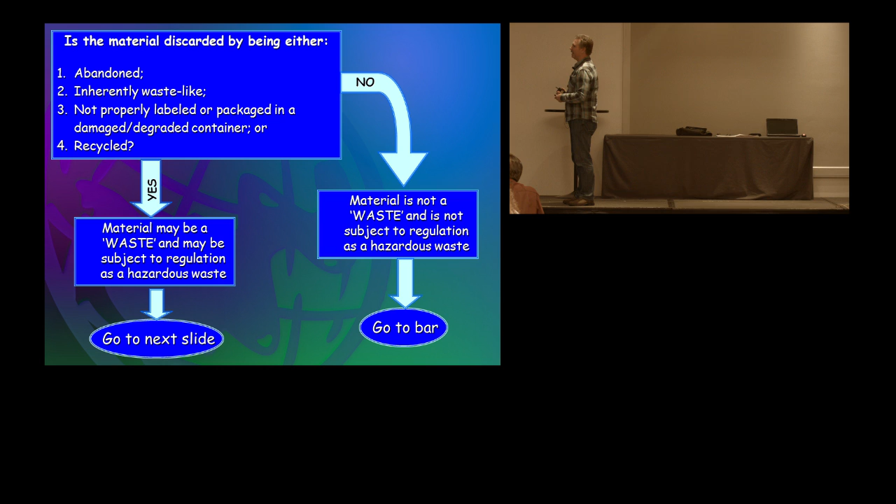Is that a big deal? Sure it is. You know, if you're looking at, do I need to do a pollution prevention plan? May not need to do that because these materials are not waste. Am I a large quantity generator? Maybe not, because these materials are not a waste. If they're not a waste, they're not a hazardous waste. It doesn't count towards the amount of hazardous waste that you generate. So there are a lot of benefits to recycling, especially if you can follow this path to where it's not a waste. So is the material being reclaimed?

Yes. The material is a waste and subject to regulation as a hazardous waste, but there can be some regulatory relief. So it's very important to see where we're falling. Both of them are recycling, but one less regulated, one more regulated.

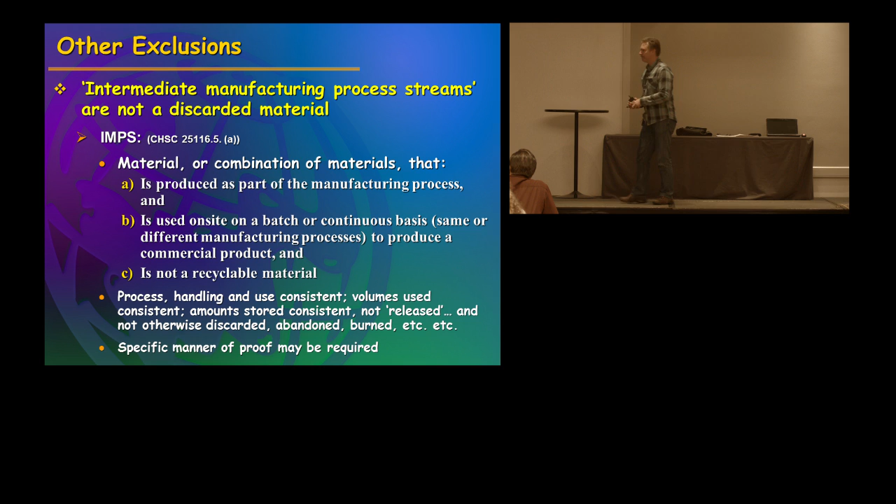Somebody at the break was talking to me about universal waste. Universal wastes are a subset of hazardous waste. If you follow the conditions, you're allowed relaxed management requirements for universal waste, correct? But if you don't follow those, it reverts back to being a hazardous waste, and you have to meet those requirements. So you always have the option on universal waste to manage it as hazardous waste, or you can follow the conditions and manage it as universal waste.

But you can't just throw it in the trash and say, well, it's only universal waste, not hazardous waste. You lose those exemptions, and then it becomes hazardous waste again. So it would be illegal disposal of hazardous waste, not illegal disposal of universal waste. Same with this stuff. The recycling exemptions, if you don't follow them, then you're going to lose that.

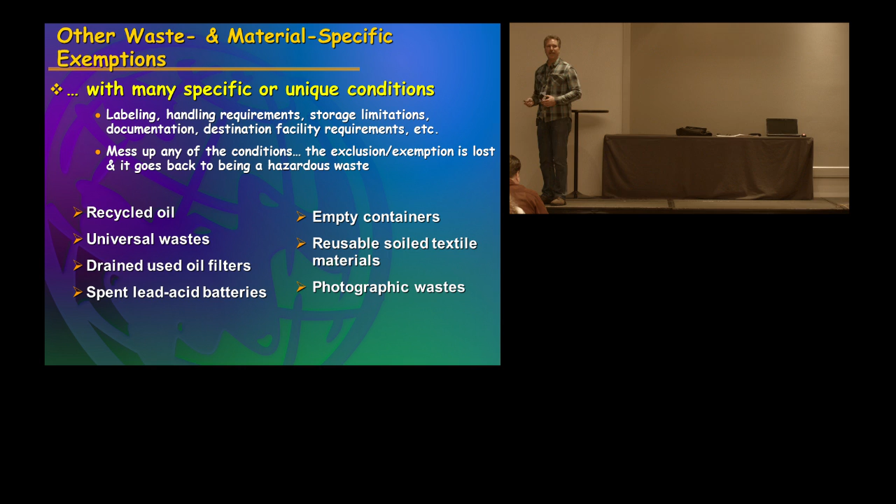There are still dental offices that refuse to go digital. But I mean, who takes pictures with film anymore? Almost nobody does. If you're into advanced photography, maybe you still are.

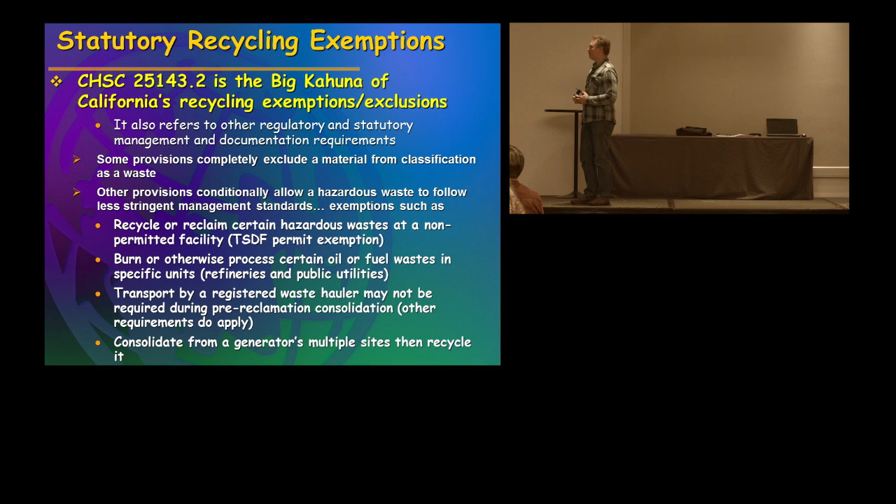Recycle or reclaim certain hazardous waste at a non-permitted facility, so not a TSDF. Burn or otherwise process certain oil or fuel waste in specific units such as refineries and public utilities. Transport by a registered waste hauler may not be required during pre-reclamation consolidation. So these are all specific exemptions that you may be able to utilize. Consolidate from a generator's multiple sites, then recycle it at one main site. So we'll go into these in detail.

Statutory recycling exemptions are not a free ride. Recyclable materials are subject to California hazardous waste statutes and regulations. Unless the recycled materials are otherwise exempted or excluded by these or other regulations, recyclable materials used in certain ways are waste when recycled. And again, this is the EPA, if you're doing these types of things, they don't give you a pass. What are they?

Use constituting disposal. What does that mean? Come on, you guys should be firing them out now. Putting it on the land, right? Use constituting disposal means it's going to the land. Burning for energy recovery, speculative accumulation, inherently waste-like. So what does inherently waste-like refer to? Dioxins. Used or spent etchants and used oil.

Most of the 25-143.2 exclusion exemptions contain wording "except as otherwise provided in subsections E, F, and G, recyclable materials that is managed in accordance with section 25-143.9." What does it mean? You still have to follow these things. What happens is when you get into recycling a waste, you get out of the generator requirements and you go into the recycling requirements. So what it's saying is if you're going to use these exclusions, these are your requirements that you have to follow now.

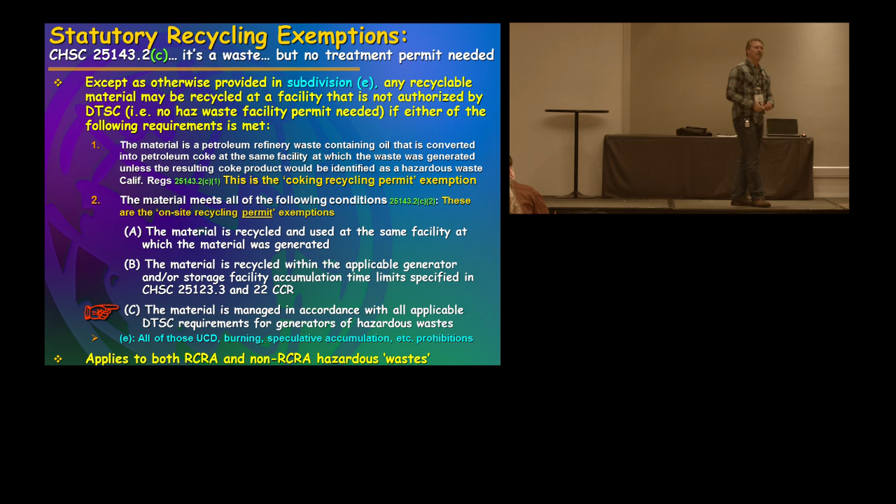So what does this give you? Basically what it gives you is it allows you to treat hazardous waste without a tiered permit. So that's something, but that's basically what you're getting out of this. You can recycle or reclaim your waste any way you want without a tiered permit. You don't need a tiered permit.

So the material is a petroleum refining waste containing oil that is converted into petroleum coke, blah, blah, blah. This exemption is for refineries. The material meets all the following conditions. The material is recycled and used at the same facility at which the material was generated. So on-site generated, on-site used. You cannot take this material, reclaim it, and sell it as a product under this exemption. It must be reused on-site.

So my example that I gave you where I had the solvent as an auto body shop and I was reclaiming it and using it at my facility, that falls under this exemption because I generated it on site, I reclaimed it on site, and I reused it on site. See, and I got to it. It just took me time.

Okay. The material is recycled within the applicable generator and/or storage facility accumulation time limits. So if you go past your 90 days, now you're storing hazardous waste past 90 days, you're no longer a generator, you just became a facility without a TSDF permit. Do you think that's bad? Oh yeah. That's why that accumulation time frame is so important, because if you go past that, you don't follow generator rules anymore. Now you have to follow facility rules.

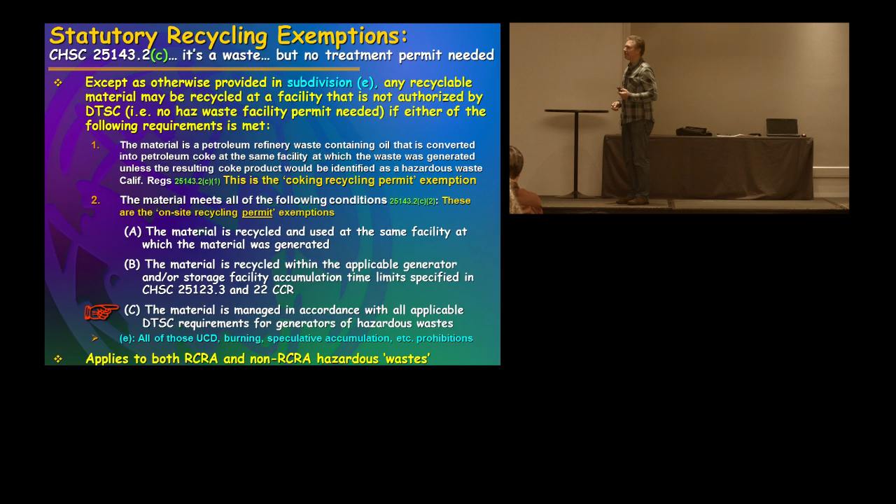The material is managed in accordance with all applicable DTSC requirements for generators of hazardous waste. The only real exception that you get for that is you're allowed to put the excluded recyclable material label on instead of a haz waste label. But the accumulation date needs to be on there, and you need to manage it within your accumulation time frame. Any questions? All right, so a couple examples of some distillation units for recycling on-site use.

The last one, D, and D is complicated, but the big deal with D is it's not a waste. So this is the other one that's not a waste, but the criteria on this one is it must be non-RCRA. So the state can never be less restrictive than the federal government, correct? So B and C are federal exemptions because they allow that for federal waste. So that's why it can be RCRA or non-RCRA. But for D, what they did is they created some additional exemptions, but they can only be for non-RCRA because these exemptions would not be allowed for RCRA waste. So that's a big thing.

It must be non-RCRA. Remember that table where we had the sludges, we had the byproducts, and we had the commercial chemical products. Under the federal government, if you reclaim them or recycle them, they're not a federally regulated waste. So they would be regulated as non-RCRA. That's where that table can really come in. If you have a RCRA waste and you're recycling it, look at the table and see if it falls out. If it does, then you can use D. And I almost prefer D over B.

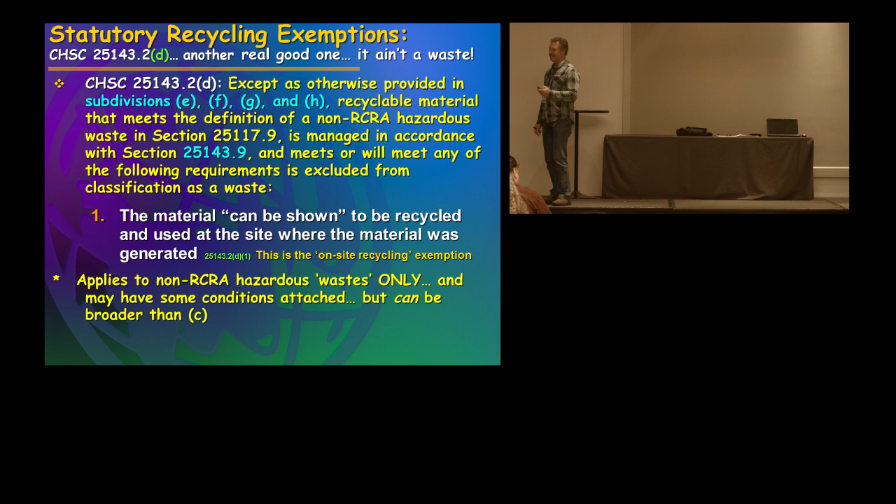Material qualifies as one or more of the following. The material is a product that has been processed from a hazardous waste or has been handled at a DTSC permitted authorized facility to process or handle the material if the product meets both of the following conditions. The product does not contain constituents other than those for which the material is being recycled that render the material hazardous. The product is used or distributed or sold for use in a manner for which the product is commonly used. So this one allows you, under certain circumstances, to reclaim it on site and sell it off site as a product. But it has to meet these conditions.

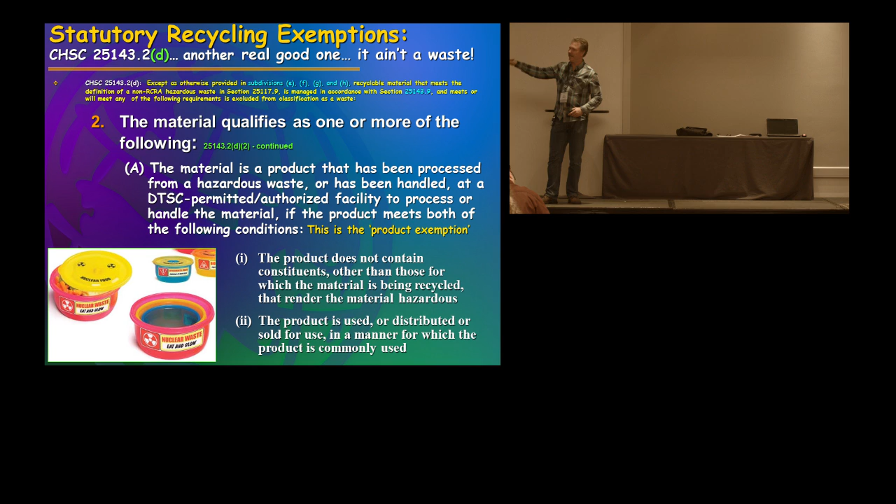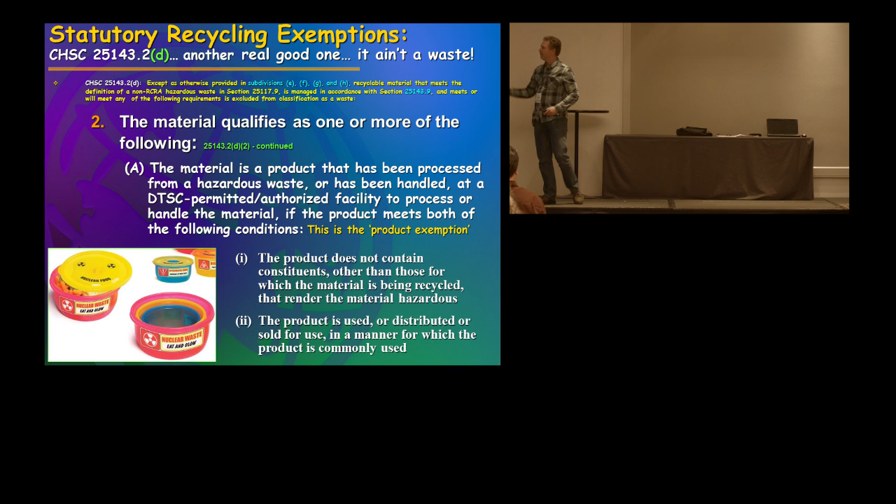Remember, one was do whatever you want to it, but you got to use it on site. If you want to sell it as a product, you got to meet these conditions. So there is some allowances for non-RCRA waste to be recycled on site or reclaimed on site and then shipped off as a product. But you got to meet these conditions. I haven't really seen much in the way of doing that.

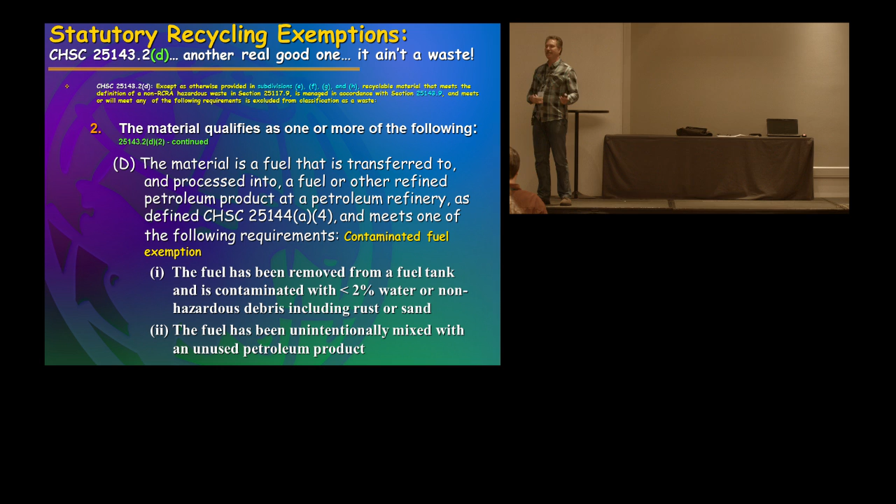And 2D, the material is a fuel that is transferred to and processed into a fuel or other refined petroleum product at a petroleum refinery. So again, this is another petroleum refinery exemption. It makes sense that if they're processing oily material, why can't they take their oil waste and feed it into their process to make a product? It's not really that much different from the feedstock that they're putting in there to begin with. So again, does that seem legitimate? Recycling seems legitimate. It's the same. The waste material has the same properties as the raw feedstock that they're using, and it's not less beneficial for them to use that.

Number 3, transported between locations operated by the same person who generated the material if the material is recycled at the last location operated by that person, and all of these conditions apply. So basically what it says is that if I have several facilities, I can drive the waste to my one main facility and recycle it there.

So it's all their waste. They don't need to use a manifest to drive it. They don't have to be a licensed hazardous waste hauler to drive it. It just allows them to consolidate the same type of waste. Now, why are they allowed to do this? Doesn't the federal government say hazardous waste must be transported using a manifest?

It's not regulated by the federal government, so it's not a RCRA waste. Again, that's why it's important that it be a non-RCRA waste on these. They're allowing things that the federal government would never allow you to do. You can't do this with a federally regulated waste. You're hauling hazardous waste without a transporter, without a manifest. The federal government doesn't have any allowances for that, but the state does. They can make allowances because this is not a federally regulated waste. So it's very important. We're only talking non-RCRA waste under D.

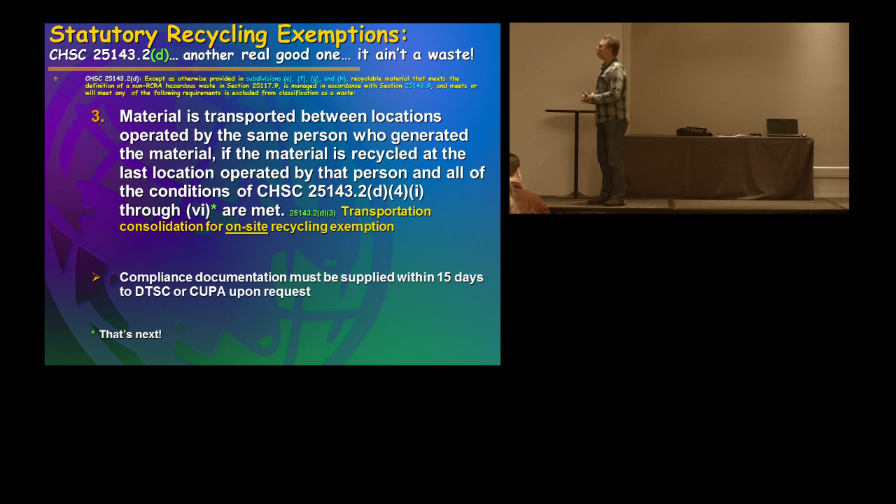And the next one. This one is just so confusing compared to this one. They're almost the same. Material is transported between locations and operated by the same person who generated the material. Doesn't it sound the same as the other one? The only difference on this one is that you send it off-site for recycling. So it allows you to transport your waste to one site, consolidate it, and then ship it off to somebody else to recycle it.

Almost sounds like remote consolidation, doesn't it? So it's very similar. I don't have the remote consolidation requirements memorized, but in reading this, it seems very similar to what is allowed. The only additional thing on this is it has to be sent to a facility to be recycled. And when I say facility, I mean TSDF. It has to go to a facility to be recycled. So it's just allowing you to pull your waste together and ship it off-site for recycling, but it's going to a facility. So if it goes to a facility, it's going to be either on a manifest or on a consolidated manifest.

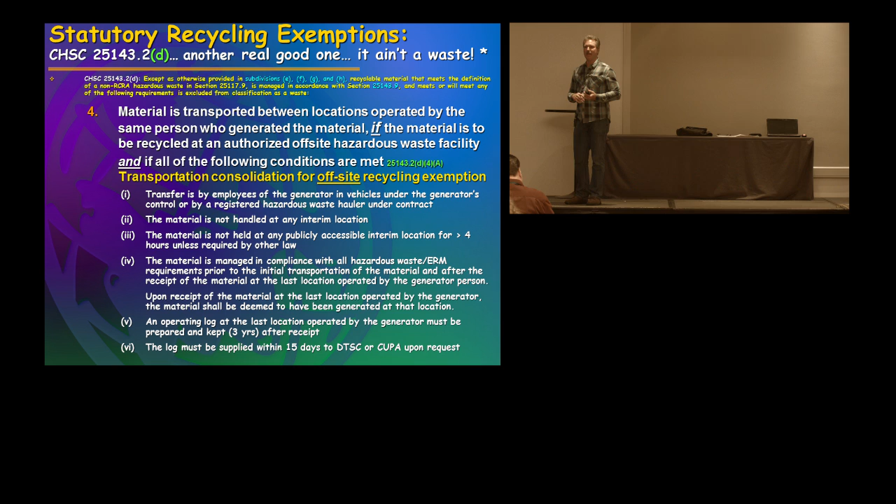All right, so now we get to 5 and 6, and they're similar, and they have the same conditions. So they're like the recycling twins, if you would say. It says you could use this for on-site or off-site, but the reality is you would only really use this for off-site. Because if you were going to do any reclamation on-site, why not just use one? Remember, there were no restrictions on D1. As long as it's generated and reused on-site, you can do whatever you want.

But the state does allow you to take your waste and ship it off-site, and the company that receives it does the reclamation. So it's almost like you're sending it to a facility, but they don't have a permit, and they're recycling it through reclamation without a permit. So this is what allows them to do that. So let's go to the next slide, and it's got the details. So this is what it says.

The material is used or reused as an ingredient in an industrial process to make a product if the material is not being treated before use or reuse except by any one of the following. We'll show you what those are. And if the resulting air discharges produced do not contain constituents that are hazardous waste and are in compliance with applicable air pollution control laws. So basically, you're allowed to reclaim it, but you can't be putting toxins into the air in the process of doing it.

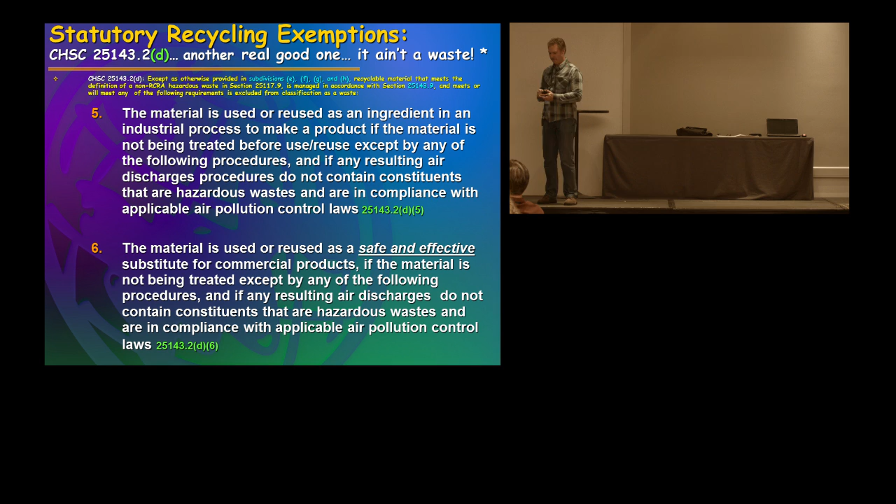So there's a lot of physical things that you can do, but you're kind of limited on chemical stuff that you can do. You can do pH, and well, viscosity adjustment's really not a chemical. pH adjustment would be a chemical change. So that's the only chemical. The rest of these are all physical changes to the materials.

So you're allowed to send your waste off-site if they're doing these types of treatment to reclaim it. You can do it on-site, but why go through this when you're unlimited on 25-143.2 D1 on the reclamation?

What if you had, say, oil contaminated with coolant or something that would gravity separate, but you want to use part of it but not the other part? Could you use this to take part of it away and use the second part? Yeah, you can. So she's asking if you're using gravity separation, part A is good and part B is no good. So you would be shipping off part B as a waste or a byproduct, and part A would be the reclaimed part. And you would be allowed to do that.

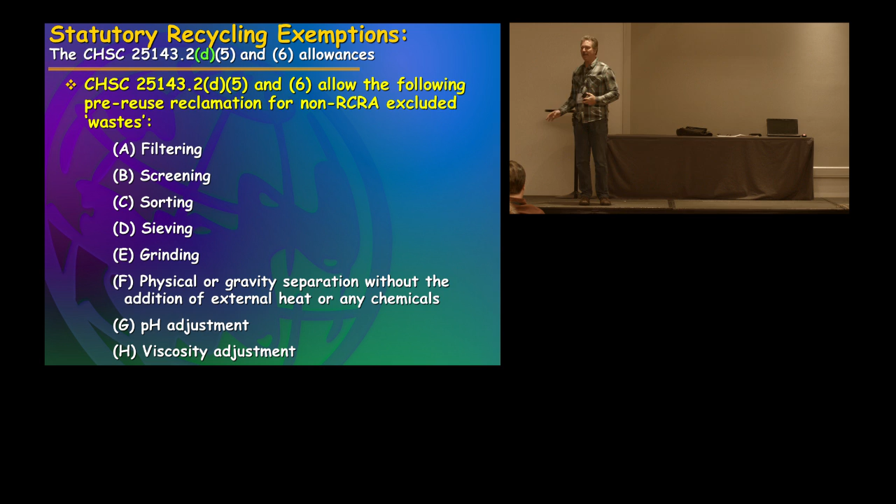They were able to recover almost 100% of the ammonia. And so they were recovering 3%. The other 97% they discharged to the sewer. The DTSC agreed that that was legitimate recycling. So they recycled 3% and they disposed of 97%. Why is that legitimate? Because the DTSC felt that 100% of the hazardous constituents were being recycled. So you can't go by a simple percentage. Again, it's case by case.

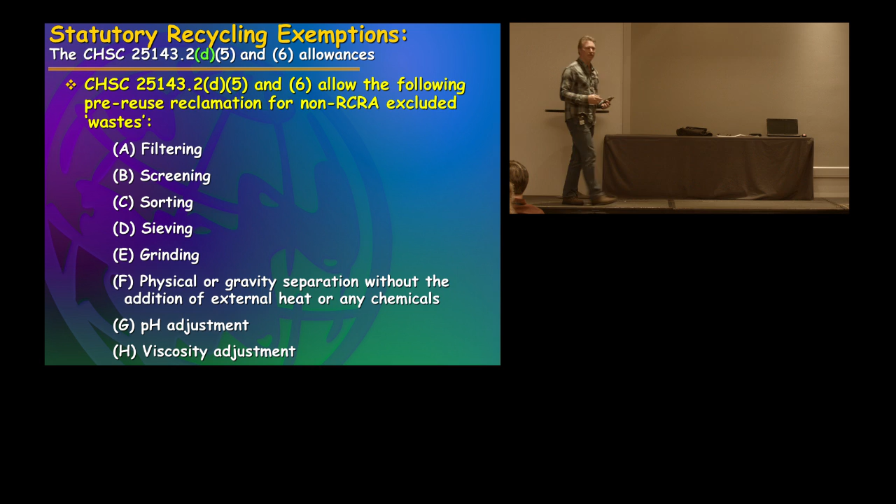So you could start with your CUPA and say, I'm thinking about recycling. This is what I want to do. Do you guys think it's legitimate recycling? And you can get an agreement that, okay, we feel that that's legitimate. So you've got to kind of make your case. This is our waste, and this is what we're going to do with it. And they'll make a decision.

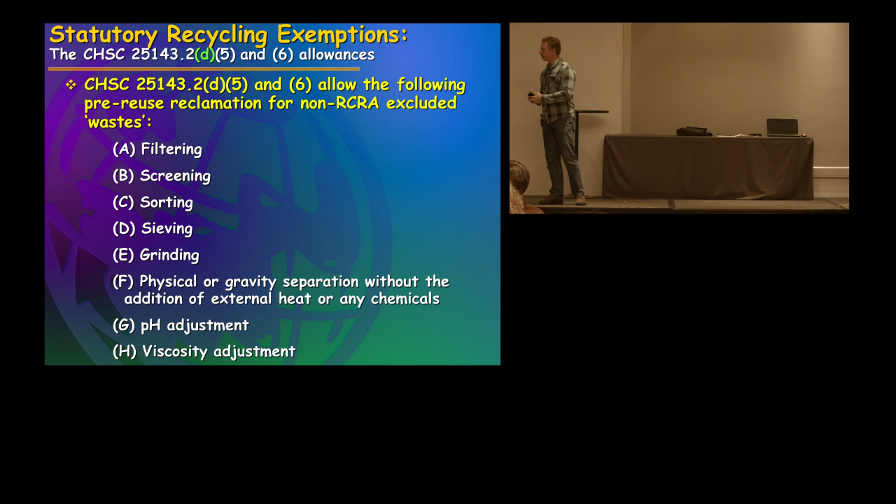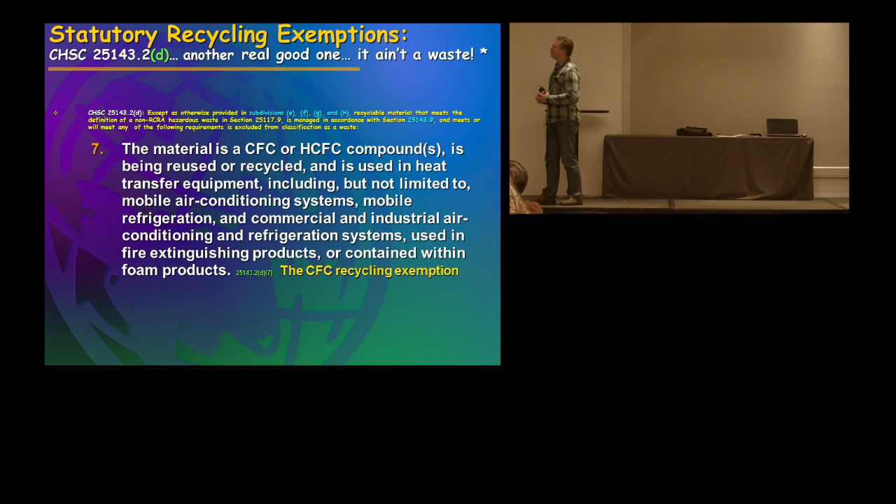The last one is for chlorofluorocarbons or hydrochlorofluorocarbons compounds being reused or recycled and used in heat transfer equipment, including but not limited to mobile air conditioning systems, mobile refrigeration, commercial and industrial air conditioning and refrigeration systems, used in fire extinguishing products or contained within foam products. So it's a CFC recycling exemption. And you do see that at facilities that do reclamation on white goods, as they call them.

So let's look at some of the things that need to be followed. The following recyclable materials are still a hazardous waste. RCRA hazardous wastes that are use constituting disposal or used to produce products applied to the land. So there's no exclusion for those. Non-RCRA hazardous wastes that are use constituting disposal or used to produce products applied to the land. DTSC can make regulatory exceptions.

I know we had one, a company was taking a waste that had zinc and they wanted to use the zinc to make a fertilizer. Zinc is an element of fertilizer. So is it being applied to the land? Yes. But is that its original intended use? Is that what fertilizer has done? Is it a viable ingredient? So they can make a special decision that that is allowed.

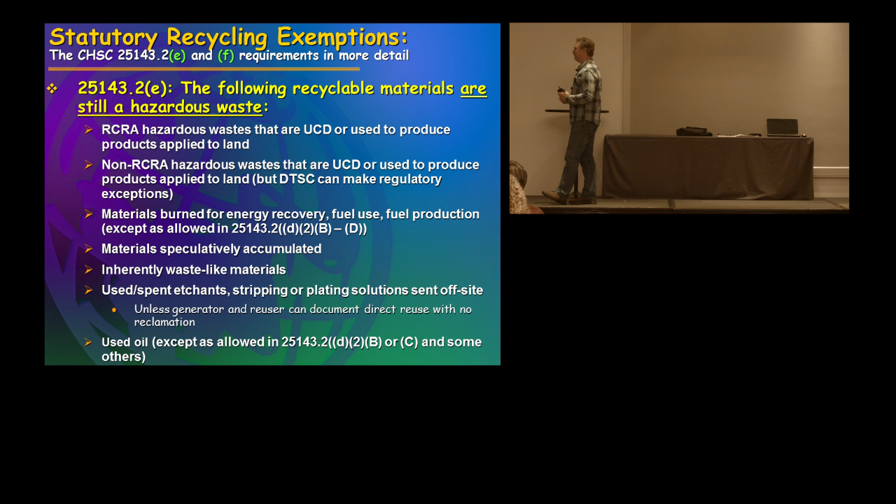But you would need that from them because you are applying it to the land. So that's where you would go to the state and have an exception made, because normally you cannot have your products applied to the land. Materials speculatively accumulated, inherently waste-like, used or spent etchants, stripping, or plating solutions sent off-site, and used oil, except as allowed in certain conditions.

F, documentation requirements for anyone claiming an exemption or exclusion, upon request by EPA, DTSC, or the CUPA, within 15 days. So they don't have very long to provide the information. Provide name, address, phone number of any facility that manages the material and any other information related to the management of the material. So if you're sending it off-site, you have to keep records of what was being sent off-site.

Maintain adequate records to demonstrate to the satisfaction of the requesting agency that there is a known market or disposition for the material and that the requirements of any exemption or exclusion are met. So you have to be able to show it's a viable product, and usually the businesses can. But sometimes, if they're trying to play games, you may catch somebody pulling a fast one.

For purposes of determining that the conditions for exclusion from classification as a waste are met, any person, facility, site, or vehicle engaged in the management of a material under an exemption claim is subject to inspection.

So basically, if they're saying it's being used as a product, they can go to that site and actually see how it's being used as a product to ensure that it's not just being stockpiled there as a way of hiding it. All kinds of scams go on in the world.

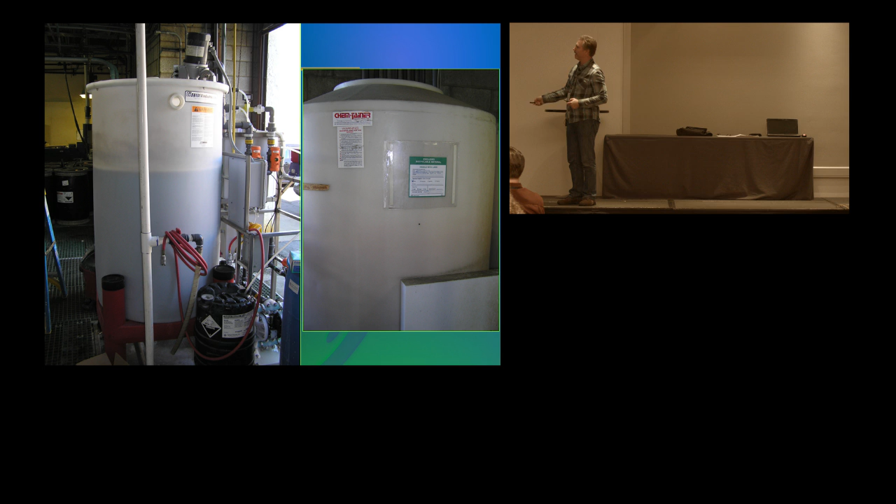Biennial Recyclable Materials Report. The nice thing about this is it's the same year as the federal biennial reports. It's a different date. The federal reports are due March 1st. These reports are due July 1st. So 4 months difference. And it doesn't apply to everybody. You have to recycle either on-site or off-site more than 100 kilograms per month of recyclable material. That would be in any given month, actually. So if you recycle more than 100 kilograms, you're subject to the reporting requirements.

A CUPA can exempt any person who operates antifreeze recycling units or solvent distillation units where the recycled material is returned to productive use at the site of generation. So basically, it's just staying on site. It's never leaving the site. Oh, lots of questions. Well, we'll go back. All right. We'll start in the front. That exemption, that's just from the reporting requirement? Yes.

Next question. I seem to get mixed opinions sometimes from CUPAs on this. The reporting is done by the actual entity that does the recycling. So if it's sent off-site, it's the recycler off-site that does the reporting. Yes. And I would have got to that because that's a great question. You know, who does the report? If you are the generator of the waste, you may not be doing the report. It's the person that is doing the recycling. And by person, I mean entity, company, whatever it is. So if you send your waste off-site to be recycled, you're not filling out this report.

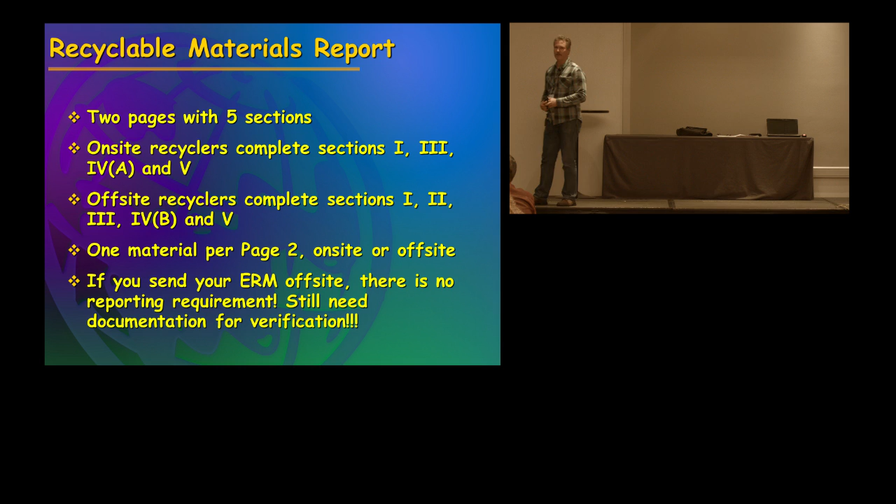Okay, so the report is not in CERS. Anybody dealt with this? You need to go to like Unidocs and download it, fill it out, scan it, and upload it to CERS. The same as you would do like for the emergency response plan or for your facility maps. It's going to be an uploaded document, but it is not a form that's already in CERS. So to do that CERS reporting, you got to manage it the same as like a contingency plan.

The report covers the previous 2 years. So this is an even year, 2016. This report is due July 1st of 2016. You're going to be reporting for the years 2014 and 2015.

Some special types of recycling. I think we'll do all these individually. Empty containers. So if they're completely empty, 5 gallons or less can be thrown to the trash, scrap metal, whatever, not heavily regulated. Greater than 5 gallons, they cannot go to the trash. They must be recycled, reused, reclaimed within 1 year. Have to have documentation on that.

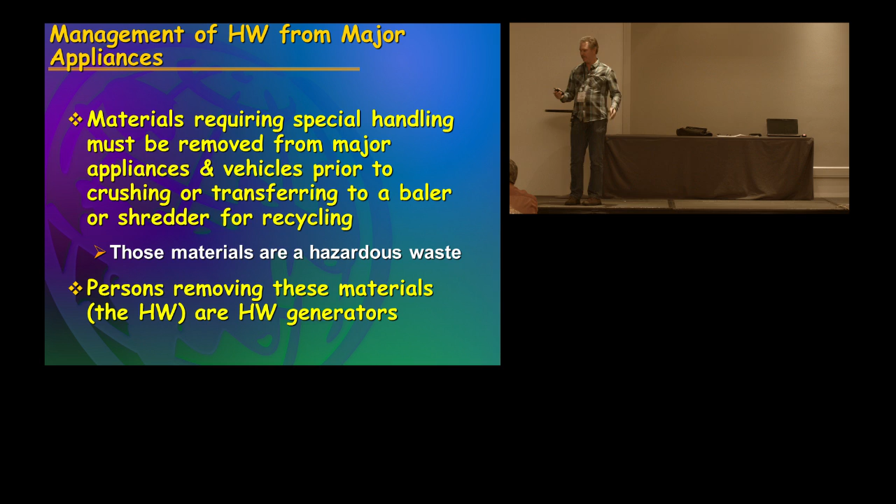All right, so I've got some examples. I'll go through them. If we have trouble, we have a microphone here. I know nobody but me is crazy enough to want to stand in front of a microphone and talk.

Is this legitimate recycling? An aerospace company generates sandblast grit waste from cleaning of various metal parts. The waste contains lead and cadmium and fails the TCLP for D006 and D008 characteristics. So those are RCRA waste, correct? All right, what if I reclaim this stuff? These are characteristic, it's a byproduct or a spent material, so we could go back to that table and see if they were being reclaimed, if they would still be a RCRA waste. So that might impact what we're doing.

The company wants to package the waste without any reclamation to be used for aggregate in the manufacture of asphalt road base material. So they're not doing any reclamation, direct use. It's being substituted as sand. You know, what's the issue on this one? Is cadmium and lead a component of roads? So is it doing any beneficial thing in the asphalt? Is it providing any, does it make the asphalt last longer? Does it have a better black luster because of these materials?

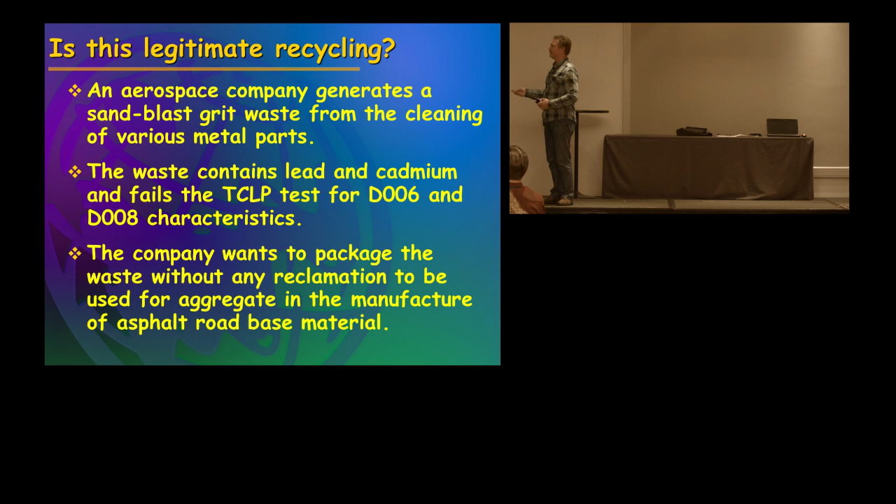So it's probably a sham, right? Or maybe even a sham, because you know it's not going to be as effective as a regular material because it's got this other stuff in it. It wasn't an ingredient that was necessary. They're like looking for a way to get rid of the stuff, so they found something that they could do with it. Doesn't have anything to do with the materials that are making it hazardous. So that's pretty straightforward, right?

Is this speculative accumulation? A company generates 5,000 pounds of a solid waste that fails the TTLC for metals. The waste was generated on March 1st, 2015. The company has the ability to recycle the waste on site using an exemption 25143.2 D1. On January 15th, 2016, none of the waste has been recycled yet. Has the company exceeded their time for storing the waste? Why not?

And so the date didn't start till January 1st. So on January 15th, it's only been 15 days. And they get a whole year. So they're well within their time. Doesn't that sound crazy?

Yes. It was generated in 2015. But the date doesn't even start until January 1st. So January 15th, it's only 15 days old. Isn't that crazy? It doesn't look right, but it is. And that's how it works.

And that's why it's important to understand that definition of speculative accumulation. Because if you go out and inspect and you go, these guys have been sitting on this stuff for almost a year and they haven't done anything with it. Are they in violation? No. They're still within their time limit.

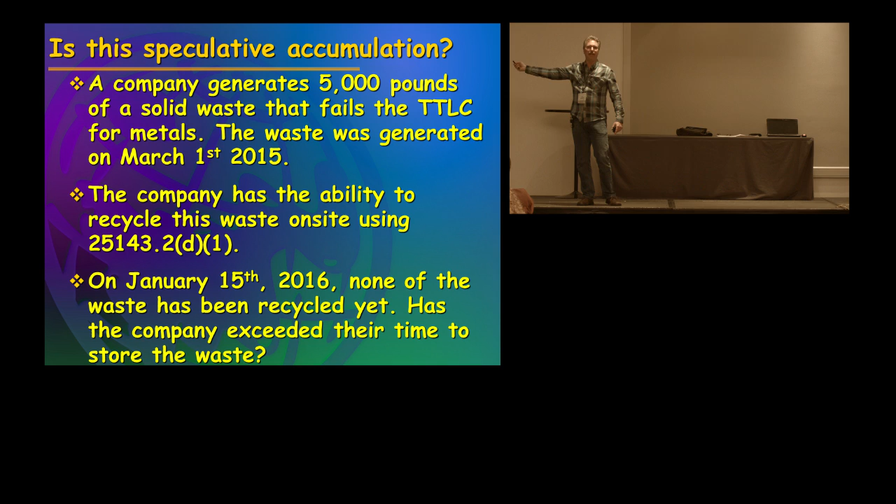I got a question. So she's asking on the labeling of this, it would have to have a label on it. They are allowed to have a hazardous waste label on there, but somewhere it needs to say they're going to recycle it, and it has to have the accumulation date, the date they start. They have to keep records on this. March 1st would be the date that they started to accumulate it. But you can't look at it until January 1st because of the way they wrote the definition of speculative accumulation.

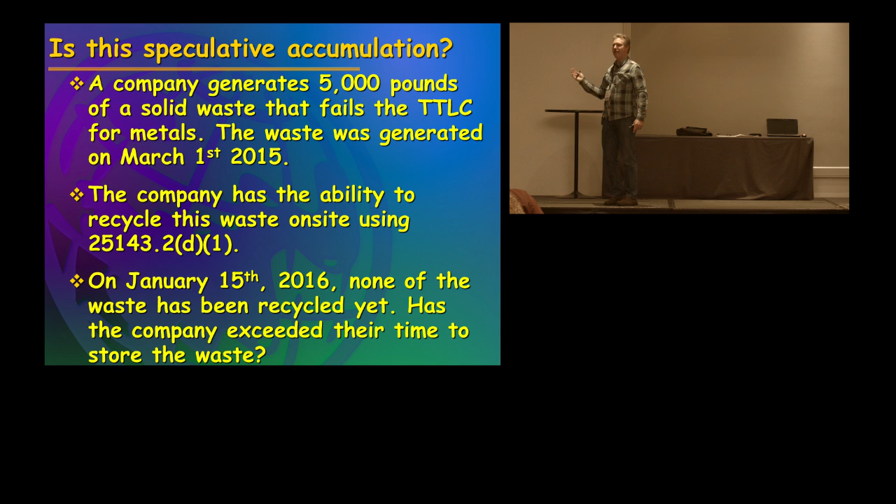It's a federally regulated waste. So D only applies to non-RCRA. So they can't use D. So it's B or C. Are they reclaiming it? And so they can't use B. B is, remember, the MC Hammer rule. They can't touch it. So C, that would be. And that's legitimate recycling under C. They are allowed to do that. But it's still a waste, and they still have to follow generator requirements.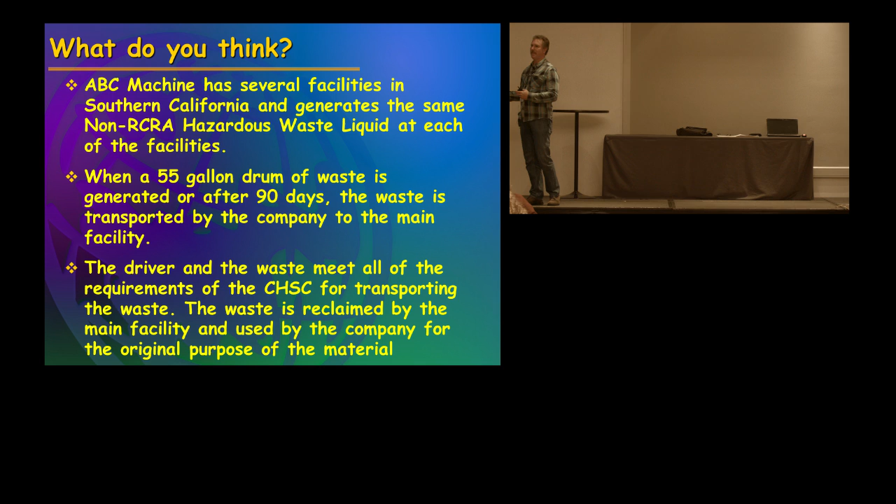D? Okay, and so there was 3. You were actually reclaiming. Remember, 4 was if you're sending it off-site for reclamation.

Maybe. So this one, it's use constituting disposal, right? So there's prohibitions on that. So who would you ask? You ask the DTSC if this would be allowed. It's not a federally regulated waste because zinc is regulated by the state of California, not by the feds. So it would not.

What do you use natural gas for? As fuel. And what are they using it for? Seems pretty legitimate that the material is being used as a fuel. Does it mention any reclamation? So no reclamation. Is it being used for its original intended use? So it seems to me it falls under B.

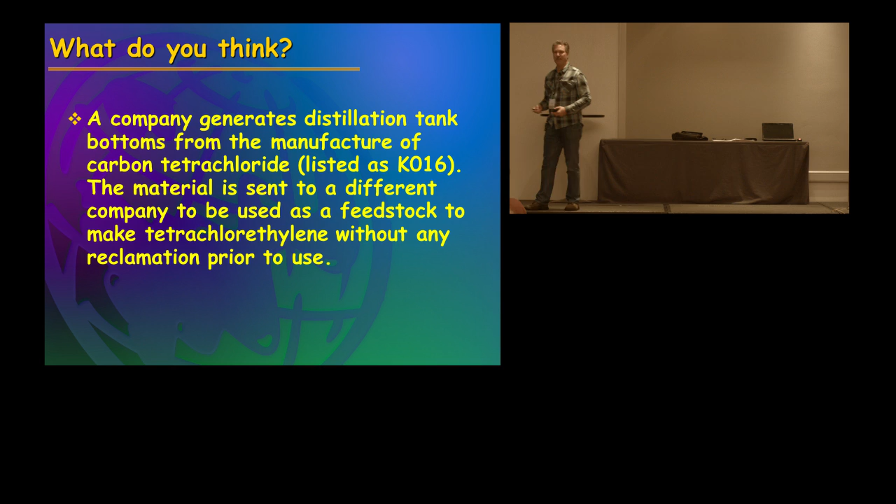So it's a substitute instead of buying raw material. So it seems legitimate. Reused or used to make a product. I see that happening. I got references and resources. RCRA, very good on these issues, but it won't deal with the California issues. And you guys survived recycling. You guys, I know there's questions.

So again, it really matters how, and I know there were some facilities that were improperly managing the stuff and other ones that were reclaiming it. They were actually collecting it and then selling it. Usually it doesn't go bad, but the containers can go out of spec. They change the valving on them every couple years. Every time there's an upgrade or an improvement, the old valves will no longer work. So it would have to meet all of the conditions that we talked about in the class.

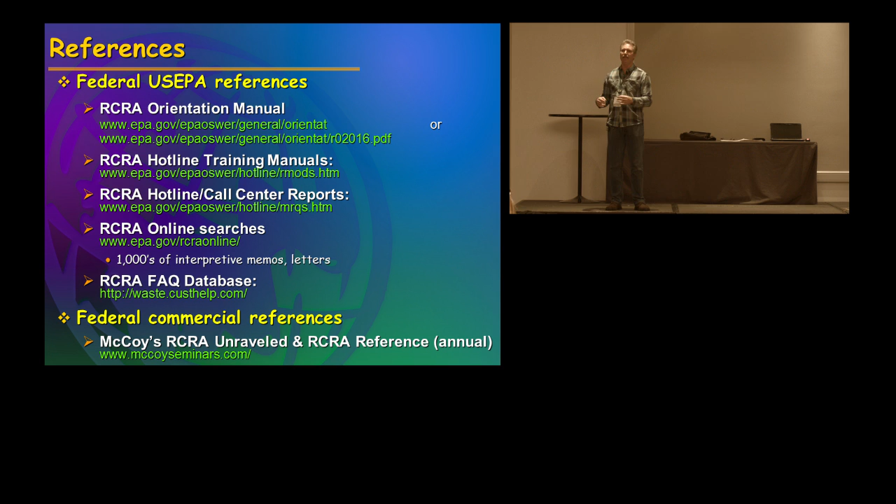So if I send my waste to a facility to be incinerated, they're going to incinerate it, and then after incineration, they're going to end up with some kind of byproduct, and let's say that is regulated as a hazardous waste. So they've created a new material, a new waste, they're the generator of that waste. They commingled your waste with other people's waste, they chemically altered it, they generated this new waste, it's their waste, they're responsible. If they mismanage that waste, it doesn't directly trace back to you, but it can.

Landfills are the worst. Landfills are storage facilities, not disposal facilities. Think of that. Because it goes there and it never goes away. So your liability never goes away. Can you buy insurance against such liability? I don't know. He wants to know if I can buy insurance on liability. Recycle all your waste and don't generate anything that you dispose of, and you'll have a happy life. And that's part of the importance of recycling. You benefit the environment, you get ease of regulatory requirements. So there's a lot of benefits, but you need to know what you can do, what you can't do. You need to follow the rules and fill out the forms.